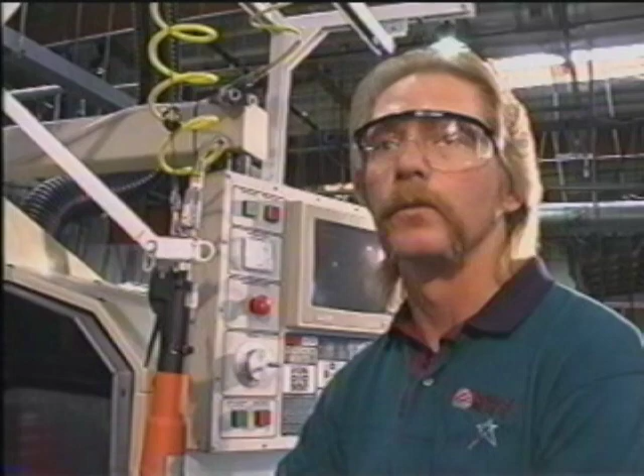We haven't had to replace them yet, over the 4 and 5 years that we've been using them. The cost savings went to a full, about $18,000 a year. We're running at a full 100%. Parts coming loose, tool breakage, the cost of delays are virtually a thing of the past.

What are these guys talking about? Well, they're talking about the new patented Tiny Vise edge clamps.

The Mitee-Bites last about a month before we have to replace them, versus the Tiny Vise, which we haven't had to replace yet. They have many, many uses. You don't want to limit this particular clamping system just to milling centers, because you can almost use it for anything. I can't believe how easy it was.

We simply switched to the Tiny Vise edge clamp. It increased our production over 30%.

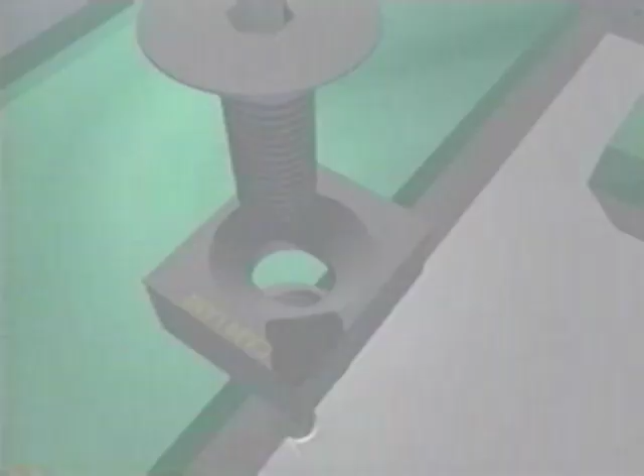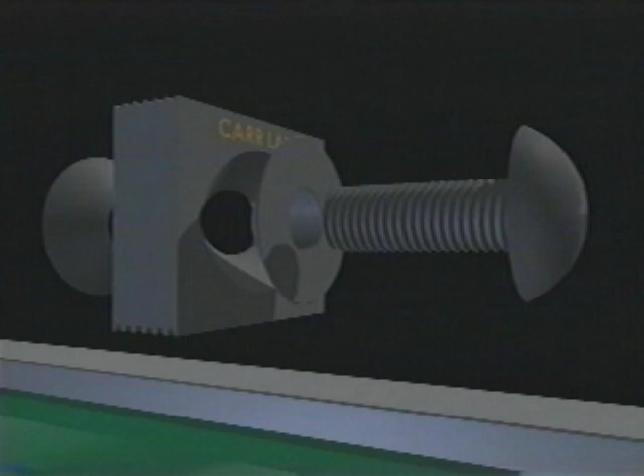Only Tiny Vise clamps exert down thrust force on the workpiece to prevent it from lifting. The thrust washer under the clamp engages a second mating countersink to provide downward action. There's also a double-edged Tiny Vise clamp, which allows clamping 2 workpieces at the same time. Unlike other clamps, they have floating thrust washers which compensate for size variation in workpieces and securely clamp multiple parts with equal force.

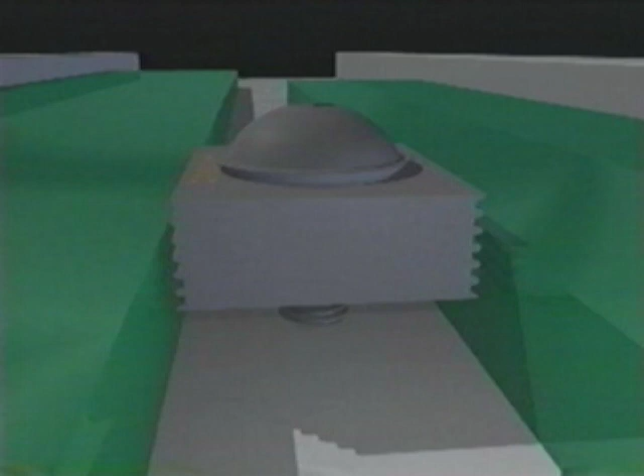Here at Quickie we make custom lightweight wheelchairs, and we use a lot of fixtures, a lot of clamping devices. Before then we were using the Mitee-Bites, thought that was the best thing on the market, until we started running into problems of it wearing out frequently because of the material it's made out of.

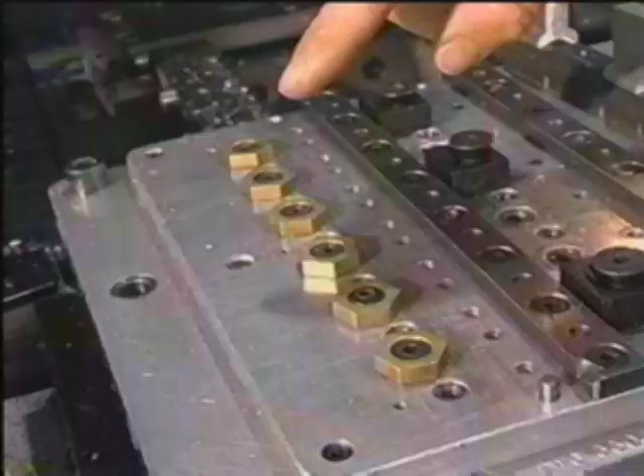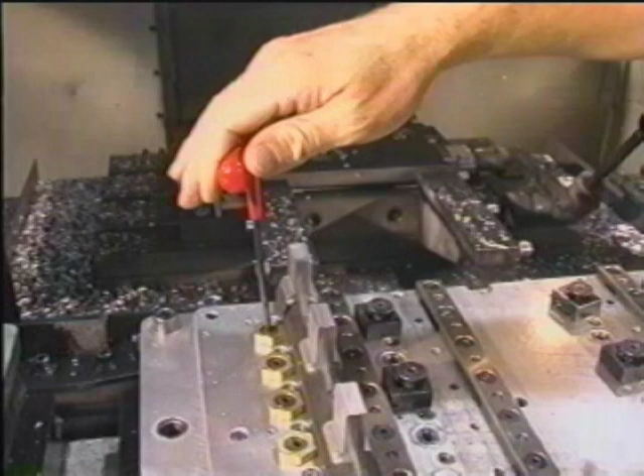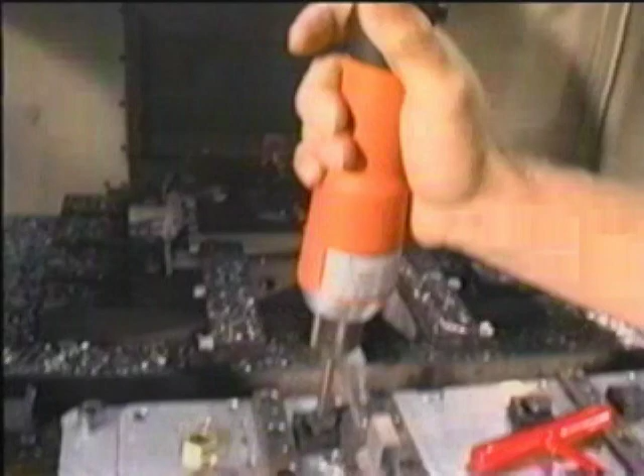On the Mitee-Bite, first it takes a lot more to hold down than the Tiny Vise. Also, getting them in, you have to use the T-wrench to release them because it's on a cam, only a quarter turn. Versus the Tiny Vise, one tool to lock it down, it's on and off.

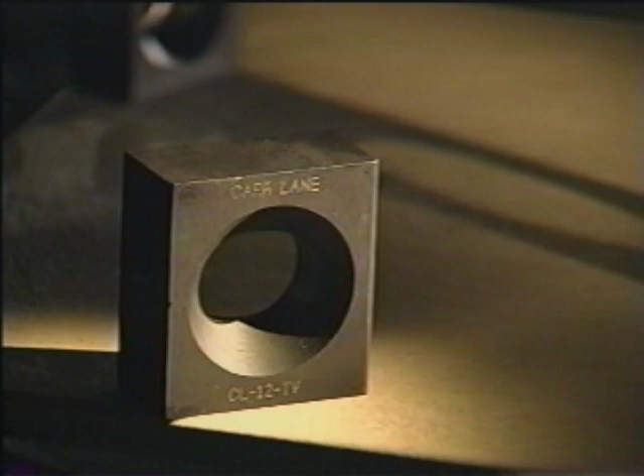Why switch to Tiny Vise? Production capacity is greatly increased, while tool and part breakage will be significantly reduced. Tiny Vises are quick and easy to switch over to. Competitors' clamps are awkward to line up and require manual force to tighten and release. But with Tiny Vise, you can use ergonomically friendly air tools. And the patented unique horizontal and vertical holding power sets this tough clamp apart.

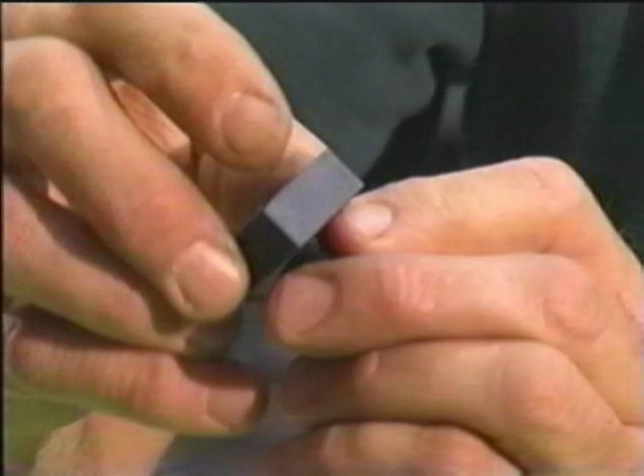This is designed so that if you are machining aluminum parts, it has a smooth side on it, and the other side of the clamp has a serration jaw, so it'll actually bite the part. Say you're doing steel, you want to really grip it, or if you want to grip aluminum where you don't care about the finish, it has an either-or option depending on what you're machining.

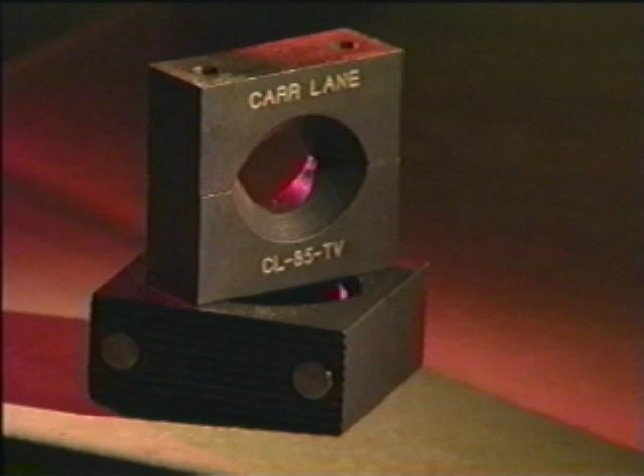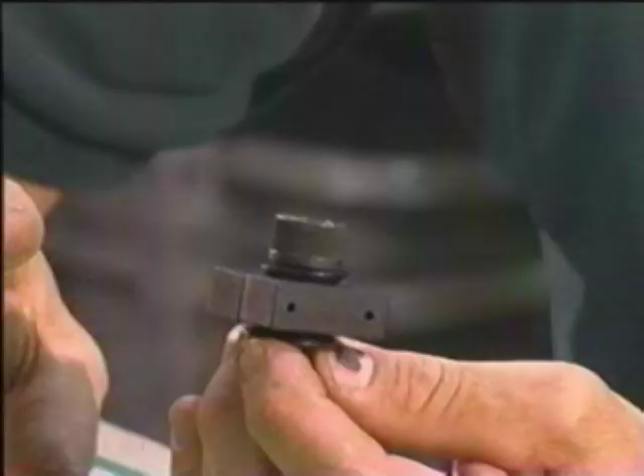This is the new Carr Lane opposed Tiny Vise. It's designed to hold a part on both sides of the clamp. The idea behind that is when you're clamping parts on each side, they don't have to be exactly the same size. One could be 20, 30 thousandths larger than another. It'll still clamp, it'll still zero in and clamp the part.

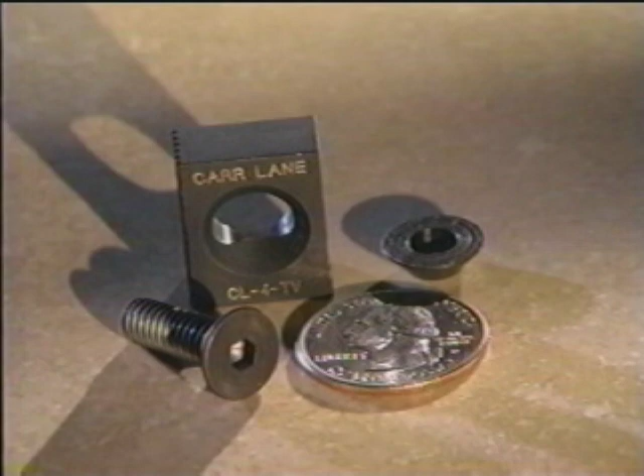With tremendous holding power, a wide range of sizes is available, from a miniature number 4-40 thread size up to a powerful 1-inch 8 thread with 2,500 pounds clamping force.

But you know the benefit that I'm most pleased with? Because of the savings and the increased production within our budget, we're able to buy the additional equipment we've been wanting for expansion. It's incredible how one simple little device can so dramatically affect our entire operation.